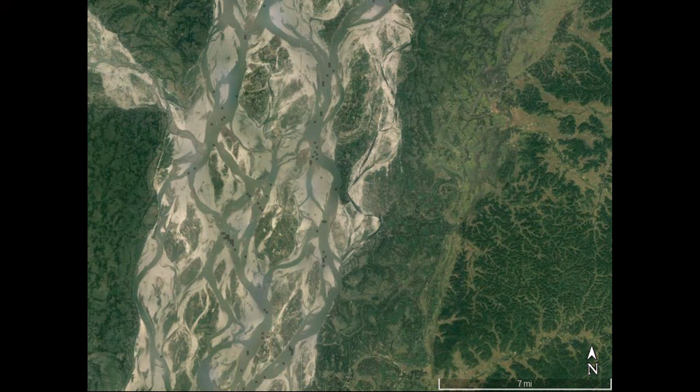Now, this is the river in the dry season, but when it's all wet, all this gets covered. So it's like a really wide waterway in which the flood comes in, and sometimes the flood even comes into these adjoining areas, and it's really like a sea of water. But the people, as I said, they continue to live there.

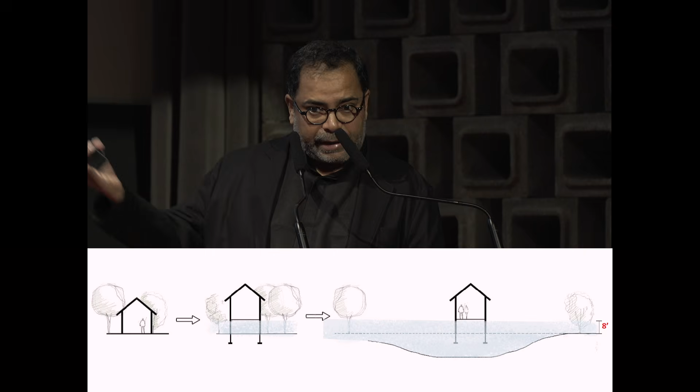Initially, our idea was looking into lifting these houses, but we saw no example of a house on stilts in these waters. It's because we have this kind of example in our country, but in the mountain areas where the water can pass underneath. But here the problem is the soil is very soft. There is no rock for 1,000 feet, or 300 meters.

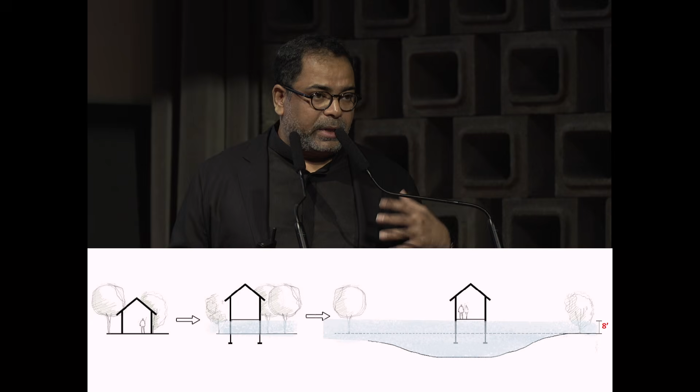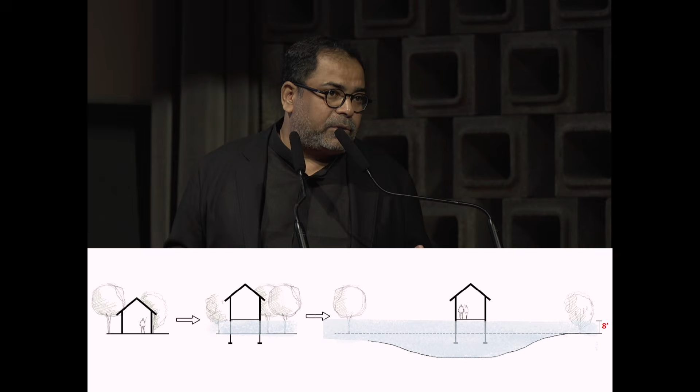Which means the soft soil gets moved when the draft comes, when the strong current comes. And if we were to hold this, then we would need really deep foundations, which of course beats the purpose, and one cannot afford it.

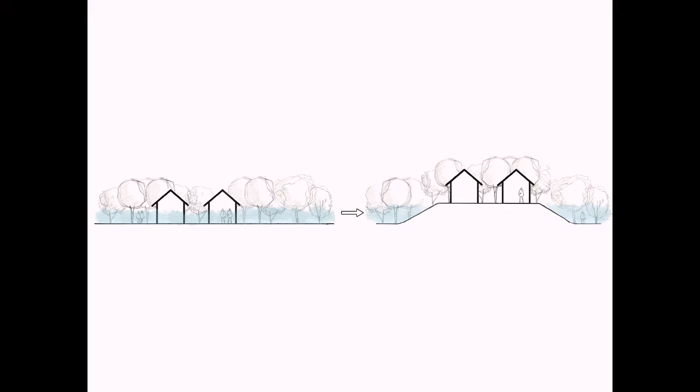So instead of trying to raise individual houses, our project was to raise the entire village above the level of the highest recorded flood. We realized they tried something like this before, but here's what happens: when the current comes, it knows no rules, and it breaks away everything in its path.

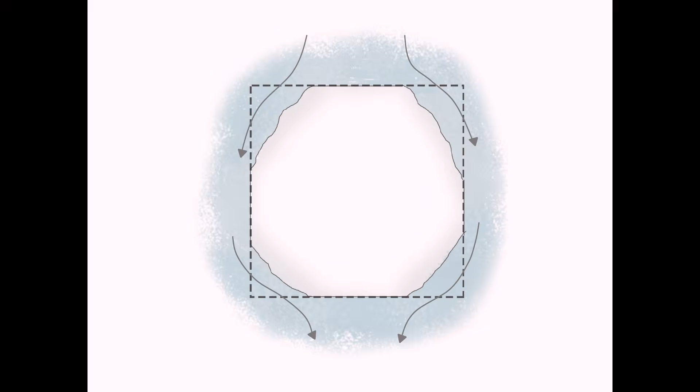We used to go to these sites in a seaplane because there's just water, and the only place to land is on the water. From the seaplane, I could look at these comet-shaped forms as the water comes in, leaving a kind of a tail. This, we thought, is what we needed: an entry point and an exit point.

And this is what we designed: an island on a simple dig and mound with a pond in the middle. We dig and create this mound, which is like a teardrop. Then when we place the houses, we try not to force a master plan.

We really try to follow the way the villagers make houses around courtyards, and these courtyards are interconnected, meaning people walk from one courtyard to the other. We worked with the villagers to give them freedom, and many times they came up with interesting solutions as well.

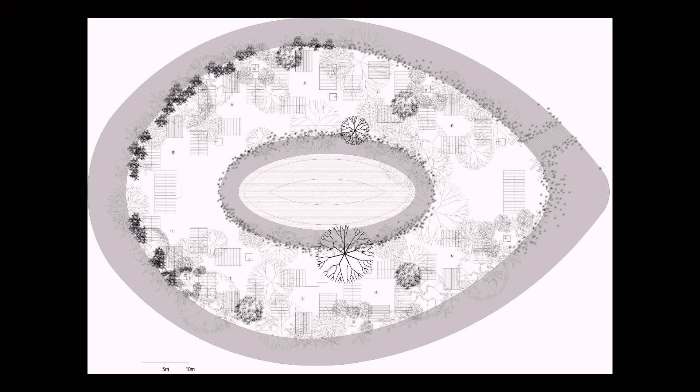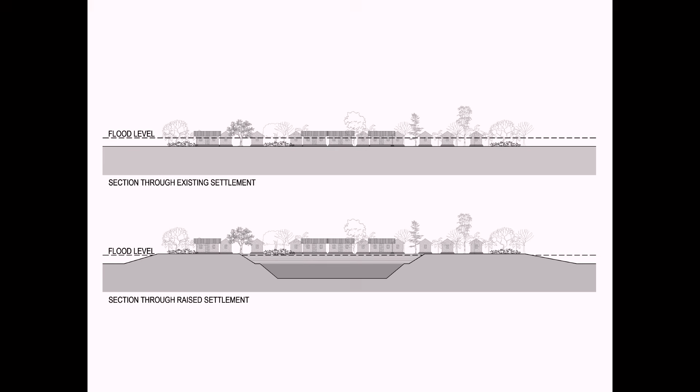So again, to repeat, to take them above the level of the flood, we have this embankment or raised village, and in the middle we have this pond, and all the houses can then be brought onto this raised settlement.

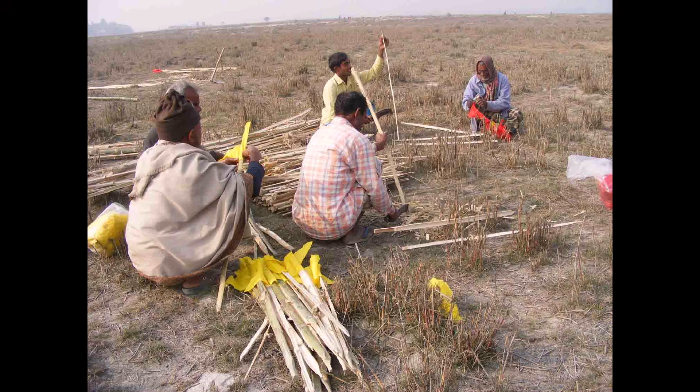Of course, we worked with very basic things. Back in 2005, 2006, we didn't have much GPS or even mobile phone signal in the very remote areas where we worked. So we devised very simple ways of laying out these islands.

Now, the program is also interesting because the villagers themselves make this island, they move their own houses, and they're paid to do it. So it's like income generation as well as food for work.

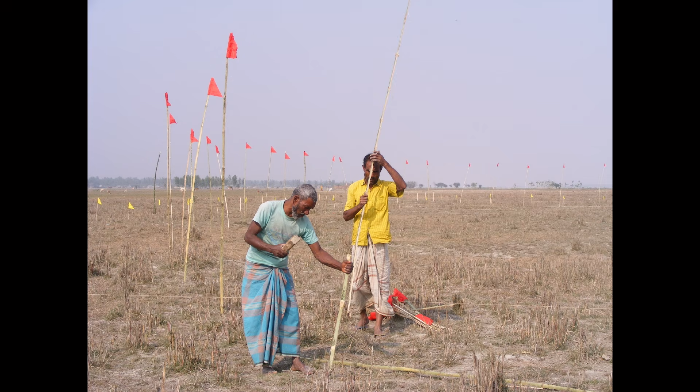This, for example, is the inner line, and that's the outer line. As you can see, it's a very flat kind of landscape, and this is in the middle of the river.

One of our architects. So again, the villagers are cutting the pond here. This, for example, is a way they keep measure of the amount of earth they cut in a day, because they're paid to do so.

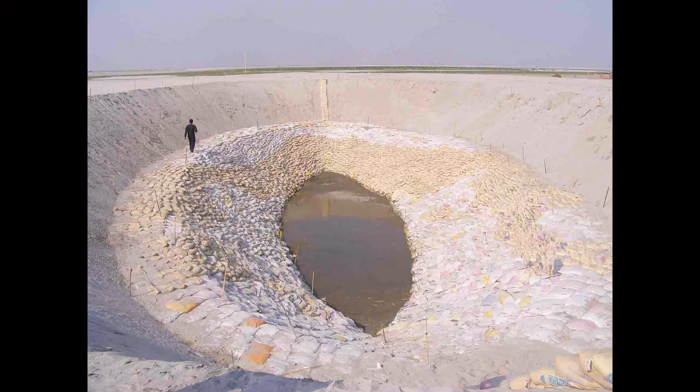So we have made about 22 of them, and 2 broke away. 2 were taken by the river, because the whole island was taken by the river — not our island, but the whole sandbank. So 20 still stand, and now we're doing 3 or 4 more, in the last 20 years.

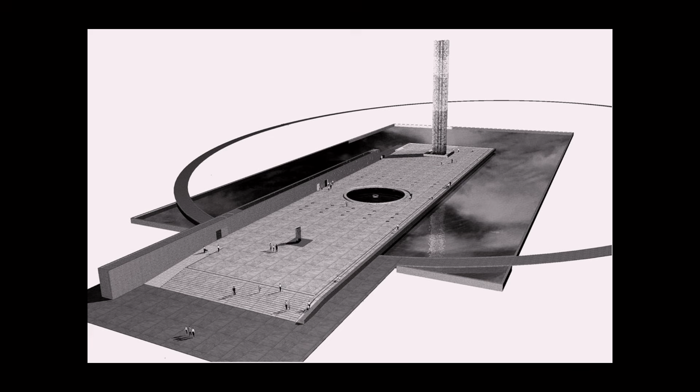The museum's winning idea was that it would be sunk below grade, which means the roof of the museum became a plaza, a public plaza holding the story of the long journey onto freedom. This wall, which guides towards the tower, also carries within it the access ramps.

As one goes towards the tower, one encounters a shallow pool of water, which is like a black hole because the water goes into the central hole. It draws the water into itself, signifying the silent bearing of torture and genocide during those 9-month long wars.

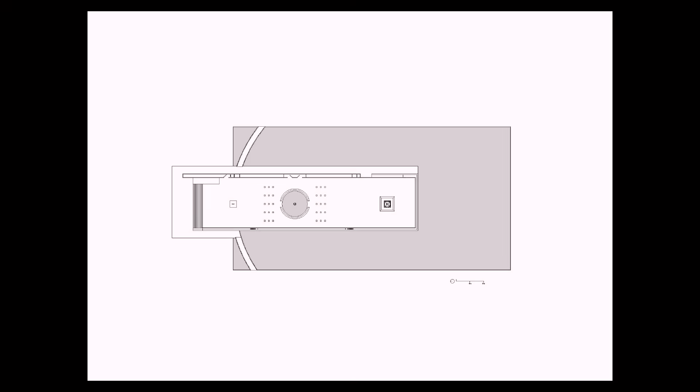Again, the plaza on top is surrounded by the water, the abstract water of the landscape, and below is the museum, where the water falls in the center.

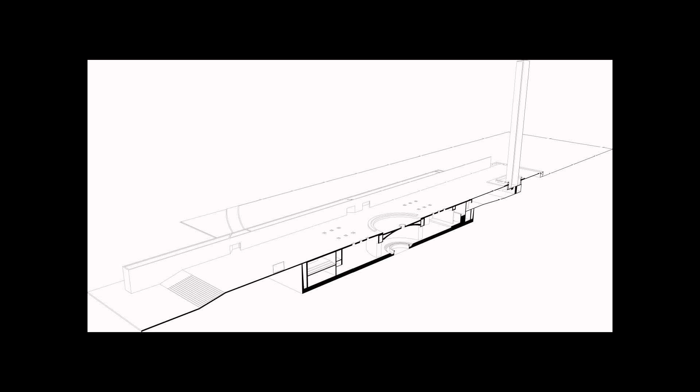Again, this is the central chamber into which the water falls, and in this chamber there are no displays. It's just a space for meditation, in the sound of the falling water and the light that comes in through the only source of light in the ceiling, through that oculus, one may remember those fallen, known and unknown.

One takes the stairs back and the ramp back up towards the monument itself.

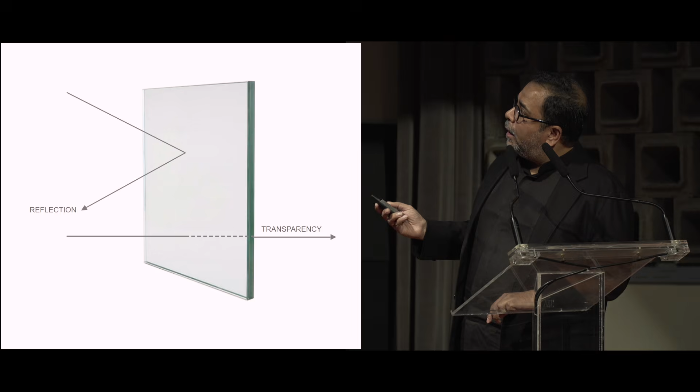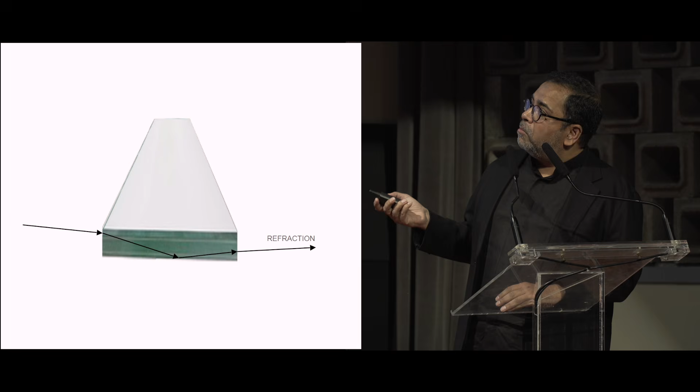Now, the monument is a tower of glass. We didn't choose glass as the material, we chose light, and the only material that could hold light was glass. Glass was not chosen for its properties of reflection or transparency, but we chose it for refraction.

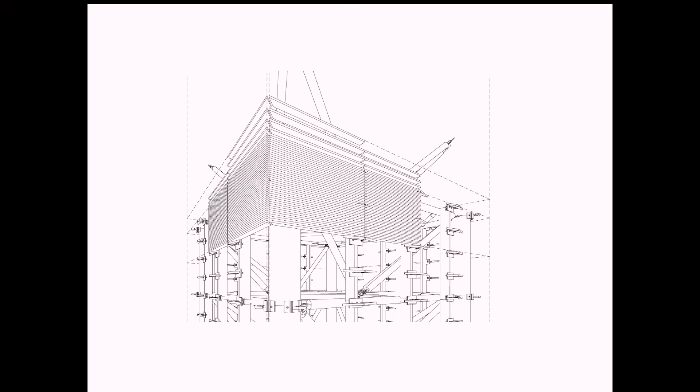So pieces of glass, 19 mil thick, 75 mil wide, and a meter long, were stacked one above the other with technical adhesive, essentially glass clear silicone. These were made to form a panel, and the panels then went onto a vertical space frame, rising to a height of 46 meters. It sounds a little technical because it is technical.

But we were at the end. I actually came to Paris in 1999 to find a glass designer for this, and we talked to RFR and some other people. But finally it was some other agency which did the detailing, and as you can see, we were quite happy with the kind of small details we came up with.

During the day, the light of course refracts, but at night it becomes like a beacon because of the light, the glass catches it. These are photographs by myself, not photoshopped. It just looks like this if you go close or far.

We had these beams shooting up, so from a distance one can see from anywhere in the city the tower of light, so to speak.

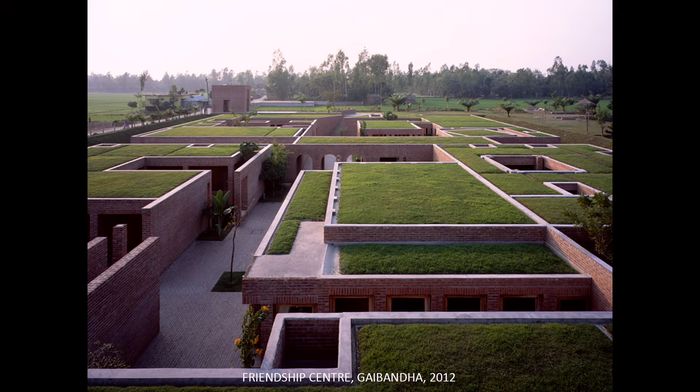So it's not true that we only work on disaster projects, we also work on normal projects. This is the Friendship Center, but this project is also vulnerable to floods, so we protected it through an embankment with a very nominal budget.

This is a university building, also very porous. There's a lot of porosity to bring in light and green, and of course the materiality of bricks, which have been in use in Bangladesh for at least 2,300 years. We have examples from the 3rd century BC, and at least some new excavations suggest it could be as old as the 7th century BC.

We have done a set of 5 mosques. I don't know why people just keep coming to us for mosques. This is the first one we did in 2007, though it was inaugurated in January 2008.

Very simple, designed to bring in light, and we had to work with a contemporary language or expression of the mosque. For me personally, it's just a shelter. I'm more interested in the spirituality of it rather than just the religious rituals.

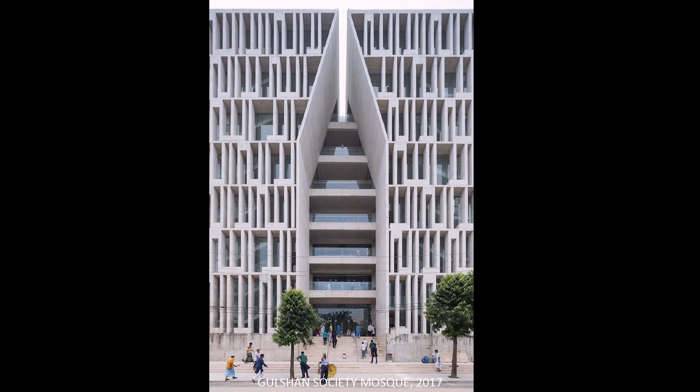This is a city mosque that you were talking about. Today, about 4,500 people use it.

A very small one is like almost a prayer room in the middle of a village. This is a pavilion apartment where we live.

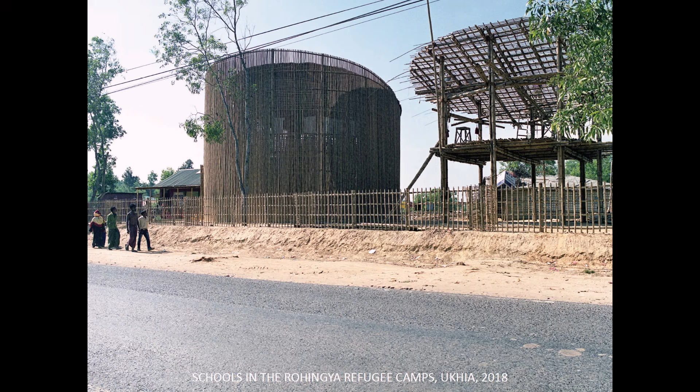I can talk about climate change because I've lived here since 2000 or 2001, and till 2008, I could live without air conditioning. I could live without even a fan, just nothing, just like in Europe. It was all right, maybe 8 or 10 days a year it was a little hot, but now it's impossible. So it just tells you the amount of heat and heat island effect that's being generated in cities, and it makes life unbearable in terms of temperatures and humidity accumulation.

This is in the Rohingya refugee camps, little schools that we made, again for friendship, on UNICEF funds, for UNICEF. We had 3 days to design and 3 weeks to build, and we could only use bamboo. There was a restriction, but we tried to open it up inside to give them a little bit more space, a little bit more sunlight, and of course, a little bit more joy.

This sculpture park and art center is nearly finished for Samdani Foundation, who are responsible for the Dhaka Art Summit. Arguably, I think one of the most important voices in art in that part of the world.

There are many things, so we just scattered the various facilities over the landscape so that the sculpture park could happen in between. For example, this is an art gallery which is in the middle of a paddy field. These are artists' residences.

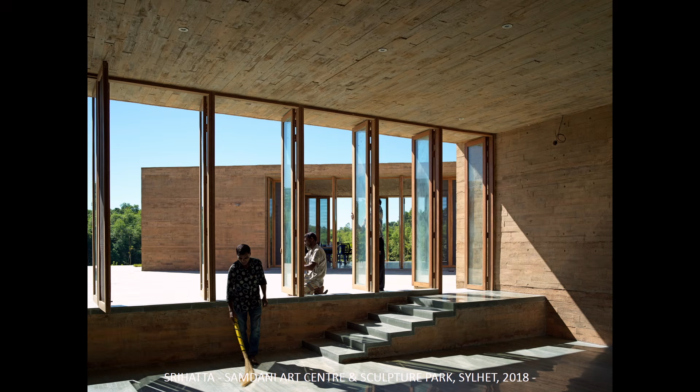This hospital is again in a remote area in a place called Satkhira, which you can see is near the border with India, in a rural landscape, in a very poor area.

But the first time I went there, I really couldn't understand why people were buying water to drink. Now, you might have seen there's so much water here, but literally not a drop to drink. It's amazing. It's because of the salt in the water. It's salty water, even underground and above ground. Now, mind you, we are 65 kilometers from the Bay of Bengal, inland, and still the water has come in.

Water underground is salty, saline, till the depth of 1,200 feet, about 400 meters. It's all salty, it's unusable. The water overland is all salty too. No agriculture is possible anymore.

Now, I know in this world today there are a lot of people, including some presidents, who think that climate change is not real. All they have to do is go to this place and they can see for themselves. I'm not making it up, I'm not promoting anything. This is what's happening.

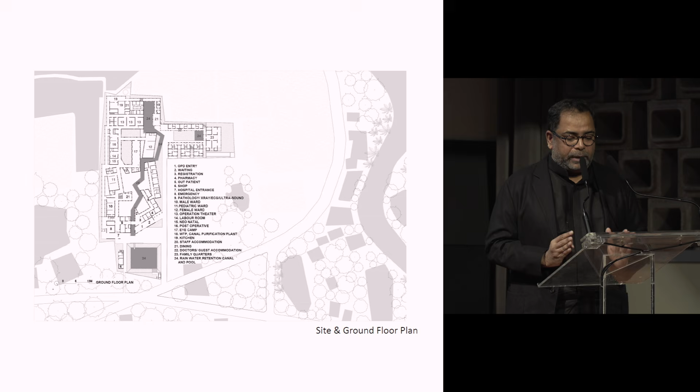So we of course know that a hospital is really like a machine. It needs to function efficiently with highest efficacy for medical care, as well as to stop any cross contamination and this sort of thing. So our idea was to make it super efficient within the given budget, but then try to do that extra for the people who are coming for medical care.

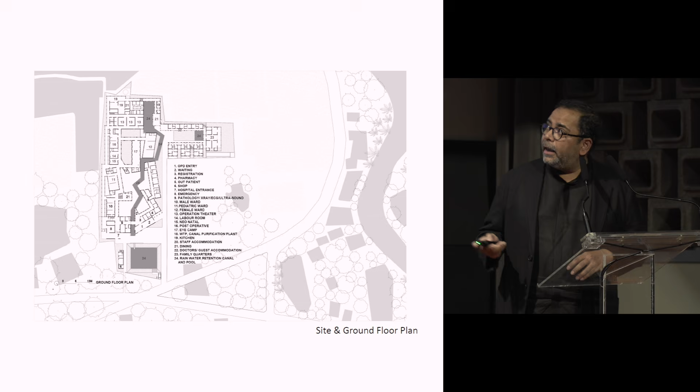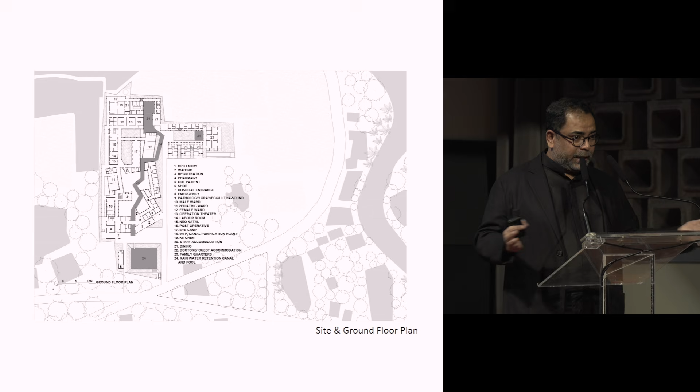So we tried to lay everything very systematically in terms of zoning, but then we needed to separate the outpatient department from the inpatient department. And because the plot of land, which is donated, is linear, dividing it was becoming even more linear, so we introduced a canal which is separating, it's access control, so you see the other space, but you cannot go.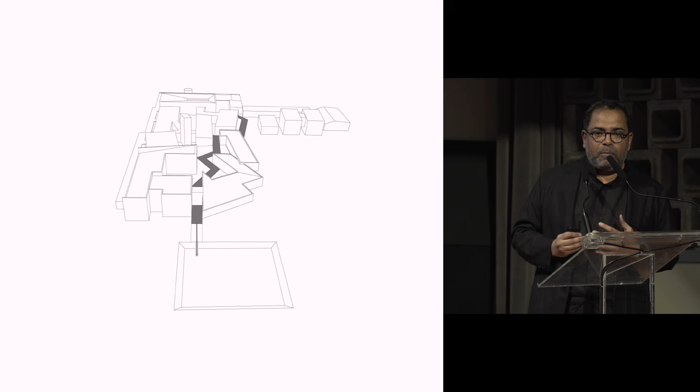This water is also harvesting the rainwater. We're not harvesting most of the rainwater, we're harvesting all of the rainwater that falls within the areas of the campus. This channel moves all along the length of the campus to collect the harvest. The water from the roofs falls here, from the plazas, from everywhere. While we say we collect the rainwater, it also means we move away the high rainfall we get in this area. So it's also a kind of drainage system.

We made maximum use of light and natural ventilation so we don't need air conditioning, and minimum use of artificial lighting during daylight hours. For example, to catch the maximum amount of breeze, we turned our buildings from this side, and fed wind into these areas, into the courtyards. But we also took help of the morning sun, the afternoon sun, and reflected light from those courtyards.

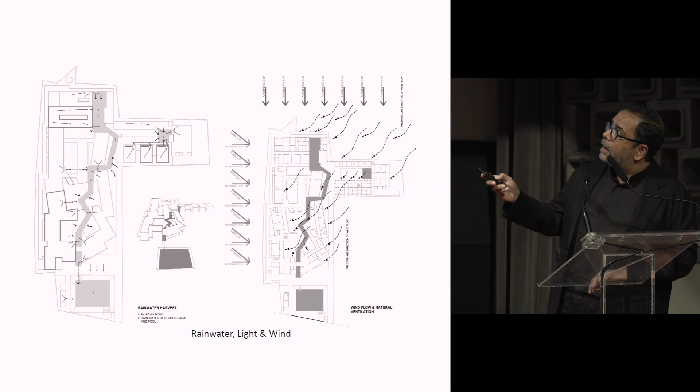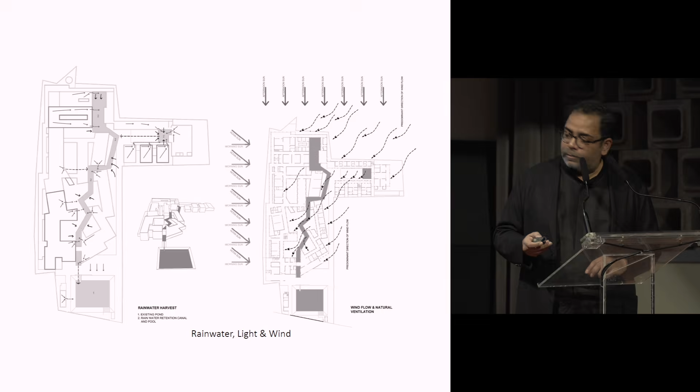This is where the collection is happening, as you can see. We have large tanks here, an existing pond here, another tank here. These are interconnected so we can collect the spill or extra water in the front so that villagers can come and use it too. These areas are paved so we can collect the water. And that's the pond in the front.

The corridors are wide enough to prevent solar heat gain as well as to protect from driving rain.

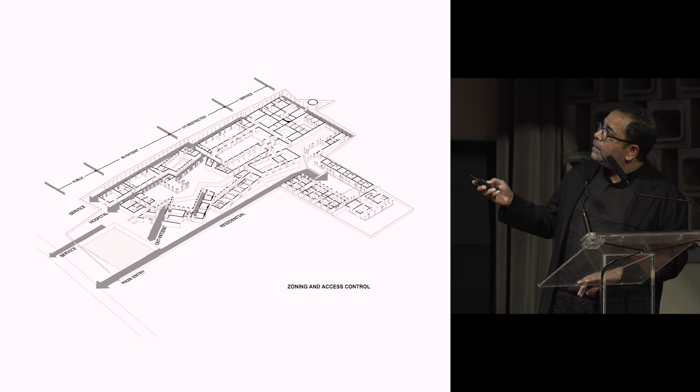So this is the zoning I was talking about. In this line, for example, this is the residential entry because the plot of land was shaped like this. So this is the residential area, the outpatient department, the hospital, and the services on this side. For the services, we introduced a long service spine which feeds into each function area from the back as well as the front. On this side is public, then in-patient areas, and these are OT or operating rooms and restricted areas, and at the back, services.

During COVID-19 this really helped because all our corridors are naturally ventilated and single-loaded, meaning there's function on only one side. This helped during COVID-19 in terms of infection and cross-infection. So the hospital could function easily during the pandemic. The water is also used for a pleasing effect, as well as for microclimatic cooling.

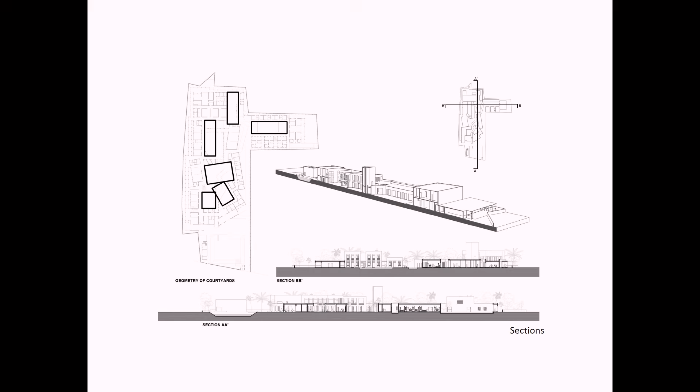When we turned our buildings, it's not a formal gesture, not for architectural reasons. We turned them to catch the wind I talked about. But then our courtyards became differently shaped. We made sure that standing in any courtyard, you have the references of the rectangle. For example, if one is standing here, this is the shape, and here, this is the other one. So the edges are caught by the different volumes and functions, which resulted in some surprising forms that worked quite well for us.

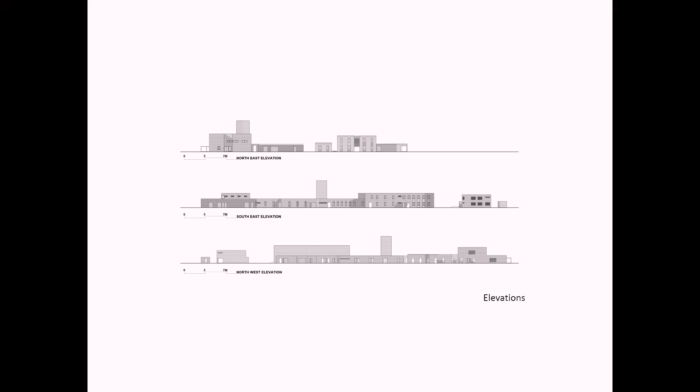The material is really handmade local bricks, to encourage local manufacture, and wood. All the windows and doors are local mahogany wood. The floor is just the concrete slab, polished. So there's no other treatment as such.

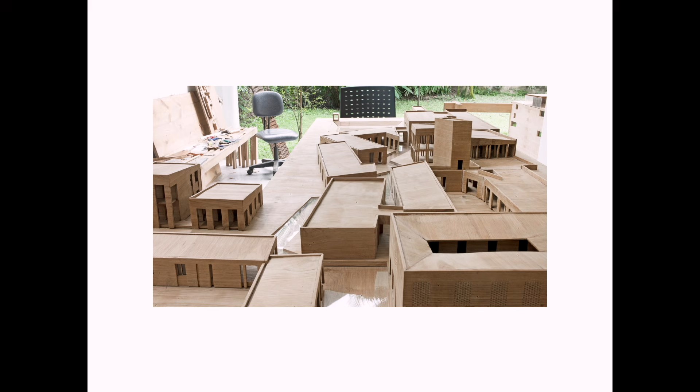We studied this in great detail in our office, in our studio, with very large models, to try to understand how these spaces were working.

The idea was to create quiet, calming spaces. We realize that once people come to the hospital, they are not looking at the architecture, they're looking for medical care. But when they enter into this recuperative stage, when they're becoming better, we believe architectural space has the possibility to be calming, to be caring as well. That's what we tried to do with the light, the natural ventilation, and the simplicity and calmness of spaces. So we really tried to quieten down our spaces and the mass forms.

Some of the things we could not estimate. For example, apparently these courtyards are used by mothers for their newborn babies because they take them out into the sun, they go for a stroll. We didn't plan this, but it happens in the hospital quite a lot. I guess nature is something we don't have to design for, it just comes naturally. If we do it like this, we get the benefits, the myriad of benefits from sun and the wind.

All the spaces overlook a courtyard or open space. So it's really like a miniature version of the delta that's outside. Inside, there's this kind of river or canal that's moving. In the small budget I talked about, we tried to create not only an efficient building, but also spaces which were meaningful and comfortable for some of the poorest of poor in my country.

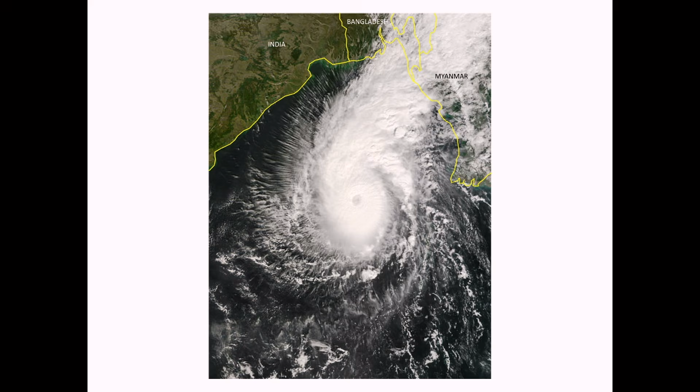This is cyclone Sidr in 2007, which formed here and slowly was moving towards India, but slowly it turned and came into Bangladesh. This is an actual satellite image. This is the width of the country, and you can see that the storm is really as wide as the country itself.

It made landfall on the night of November 15th, causing fatalities of more than 10,000 lives. This is documented - 10,000. It could be much more still.

This is how it moved in. I was in Dhaka listening to the radio, and my friends who were photographers who were there said, we cannot talk about it - if you want to see it, you come and see it. And that's what we thought of doing the next morning.

Myself and 3 other people from my office went to this place, which is about 250 kilometers from Dhaka, and it took us 13 hours to reach because all the bridges were down, broken, nothing was working. From there we hired a boat, a small country boat, a wooden boat, and we lived in the boat for 4 days and 4 nights.

We traced the path of the cyclone. We went everywhere that the cyclone had passed through, trying to understand what happens during such a phenomenon. I work as a photographer, so I took photographs, and we made some audio recordings - not interviews, but just recording what people were talking about or saying.

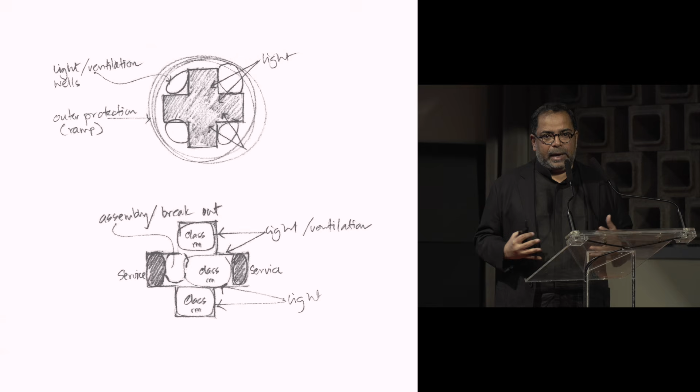So that was one of the things. The other thing, of course, we realized is that nothing else stands in the path of a cyclone. Masonry structure, steel structure, these don't work. Only concrete, heavy concrete structure. So that's what we designed.

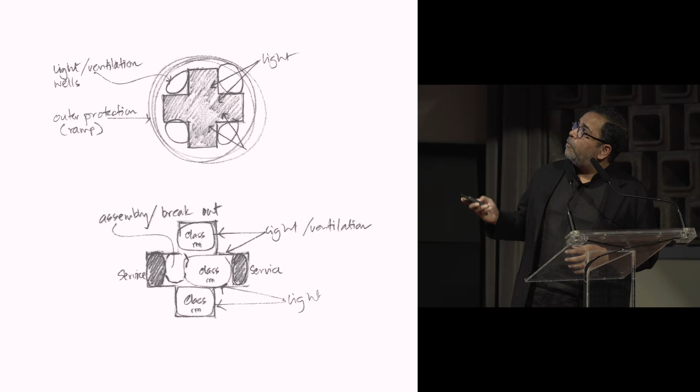So it's a very simple cruciform-shaped plan, and we sought to protect the entire building with a wraparound ramp. This ramp could then protect from high wind and hydraulic pressure.

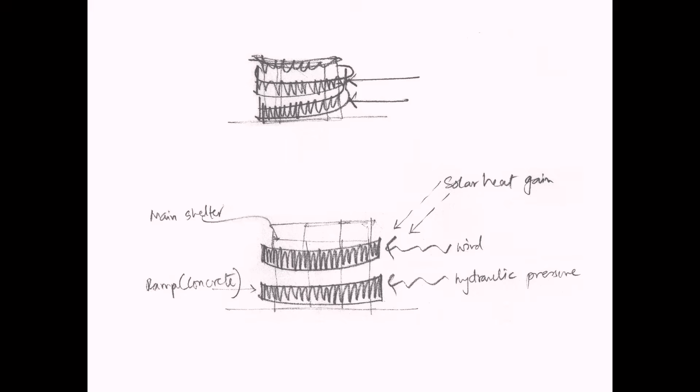As you can see, during normal times, it would function as a school, a primary school, and a day clinic. On the ground floor is this day clinic, and we have small rooms which are storerooms for furniture. So in times of a cyclone, the furniture can be moved to those stores, and the entire area can be cleaned up for people to come inside. The same goes for the school with the storerooms.

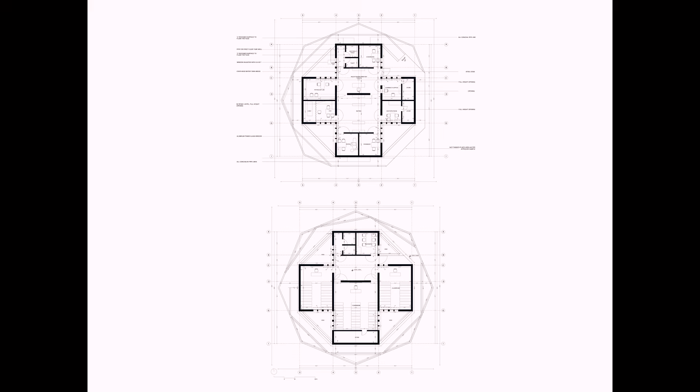And then one goes to the roof. The ramp leads all the way to the roof.

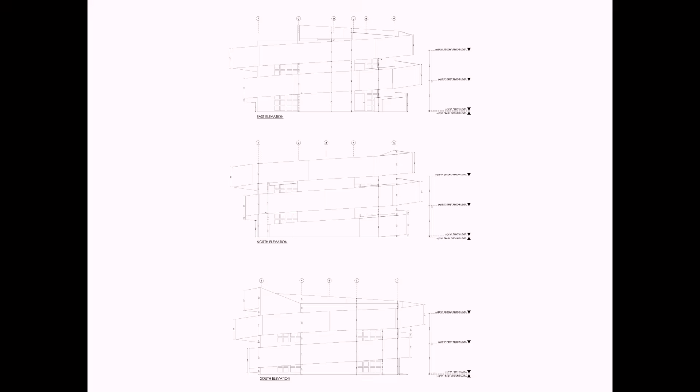The other thing we found out was that the windows don't work. Normal windows don't work because everything is flying during a cyclone - all sorts of debris, tins, roofs, doors, even entire trees are flying. So these come and hit the glass, and the glass breaks, and the howling wind comes in. It's traumatic for the people, and they are not protected.

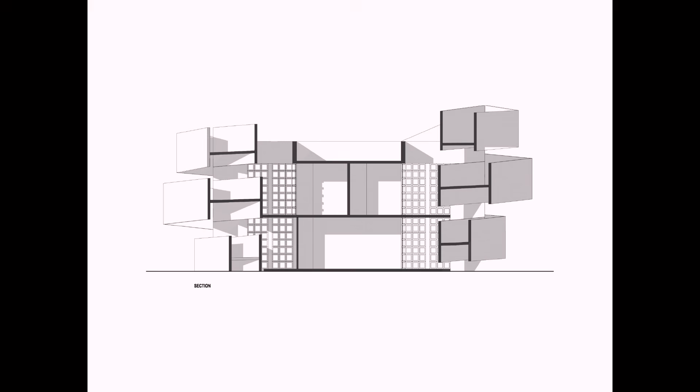So we changed our windows to these little pigeonhole kind of egg crate devices, which are recessed in the concrete, and the glasses are made smaller for higher strength. These are tempered glasses set in aluminum, powder-coated aluminum.

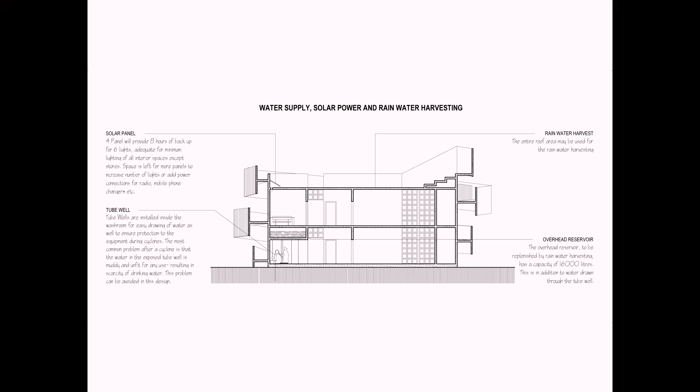And we provided rainwater harvesting and solar panels for this facility to function off the grid. So again, the main building is a cruciform-shaped building with light wells and ventilation wells in the corner, and this ramp protects the entire ensemble.

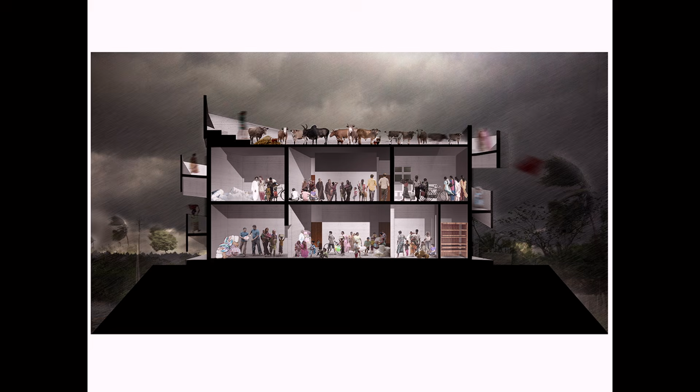What happens is, again, the cattle here is a factor - the cows and the goats, just like the first project I showed - because the people bring them with them, since they don't want to lose their cows. And then they cannot bring it inside. So our solution was to make sure that the ramp goes all the way to the roof so that the cows and the goats can be on the roof and be saved from the tidal surge that I talked about.

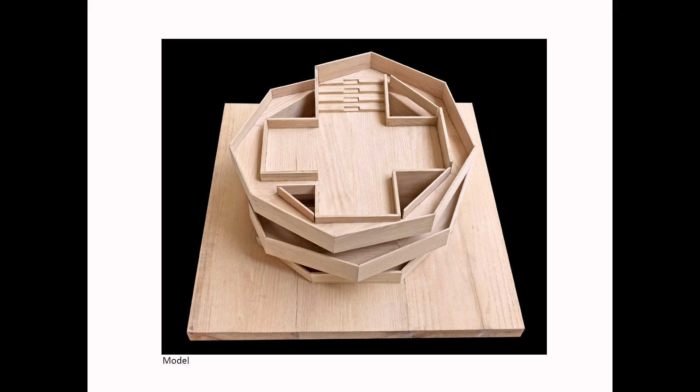So we had a design. In 2007 or 2008, we had a design, but we didn't have the money or the land. We didn't have a project as such to make. And we made a book to raise funds to make a prototype. We tried to sell this as a kind of fundraising, and we failed. We failed for 6 years.

Then in 2013, there was this exhibition in Dhaka where, among other projects, we kept this one. In the client section, it said 'client search.' There was a group visiting from Luxembourg, and they said, what is this client search business? We said, we're still searching for the clients. One of them said, do you think it's a possibility that we take this exhibition to Luxembourg and try to raise funds there? I said, by all means.

So this person, Mark Elvinger, made the effort to take the entire exhibition to the Foundation of Architects and Engineers there. There were some events. At this exhibition, my wife, who's a musician, gave a concert, and we were able to raise funds for one structure, which is 280,000 euros.

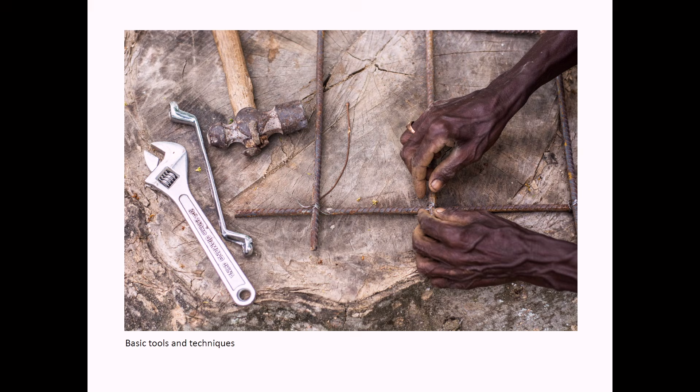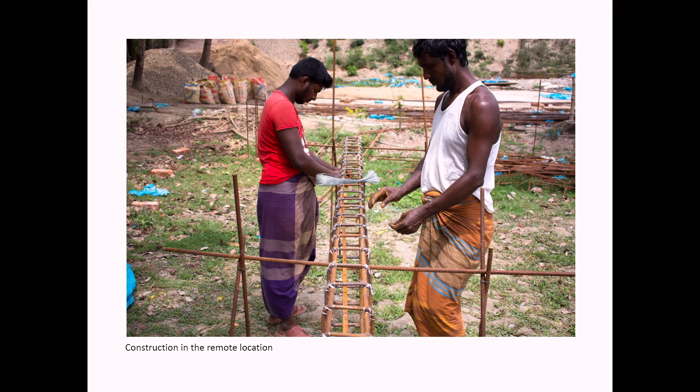Work began with all energy back home. The contractor we got, because this is a very remote area, nobody wanted to go there. So we had a local contractor who had never worked with concrete, and they had no clue whatsoever. We had to train them, and as you can see, very basic ways of doing things, but slowly the building began to rise. The initial concrete work, as you can see, was not good at all. We struggled quite a lot to try to make them understand.

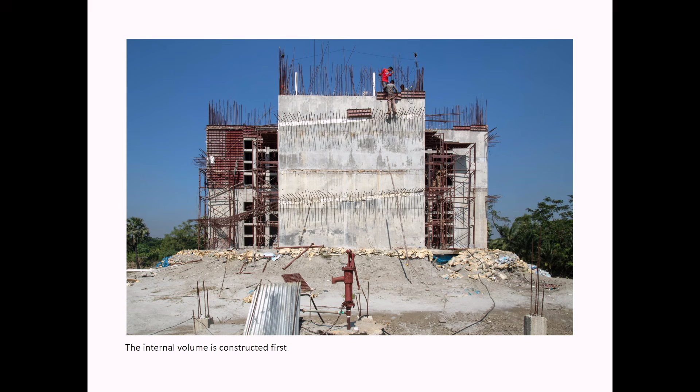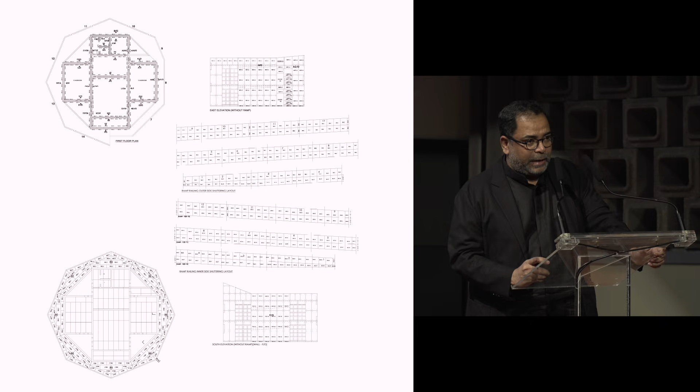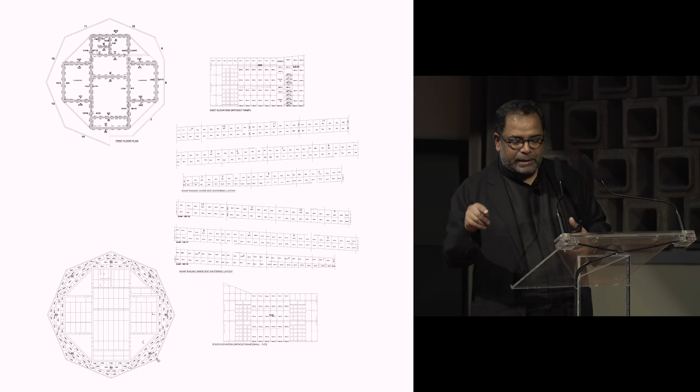They couldn't understand why we have to have this surface this way or that way. But slowly it became better. And of course, they are not to blame for the entirety of it, because the ramp, as you can imagine, is turning as it's going up, which means every formwork is different and everything had to be different. It was complicated for them. It was even complicated for us. But finally, slowly, it started to work.

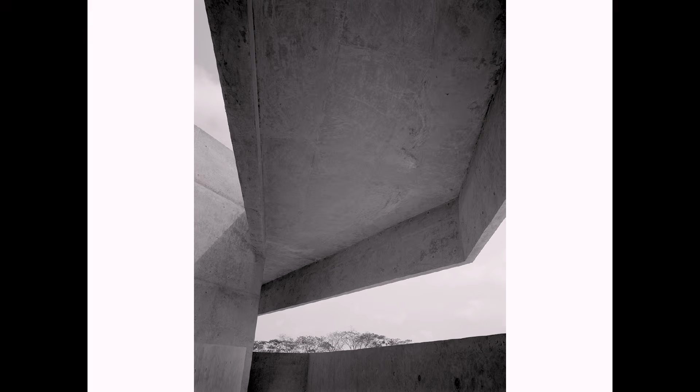given shelter to people in times of 4 cyclones. So you can see how people took shelter, because in this kind of a scenario, if they do not go to the shelter, they will die. It's not an if, it's not a question. They will simply perish. So this is an architecture which stands distinctly and firmly between life and death.

So just to finish, if we talk about care, I think it's 2 sides of the same coin: the care for humankind and the care for the natural world. After decades of so-called signature architecture or starchitecture, I think we have now come to the point where we realize that architecture is really about responsibility. It's about a critical response

in a world which is increasingly becoming fragile, not just ecologically, but also economically, politically. So I think as architects, we have a lot of responsibility to not just work with information, but also to work with knowledge, which is, of course, much more. And not just our own knowledge, but world knowledge.